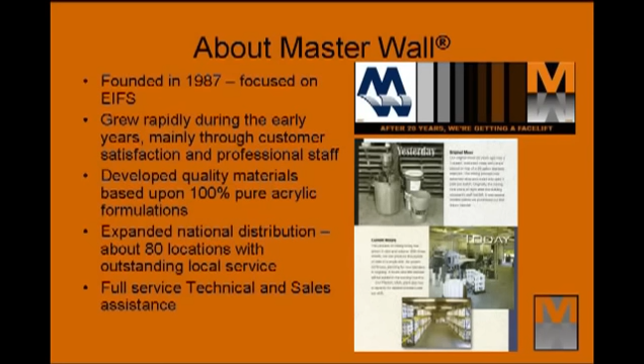Master Wall was founded in 1987 and remains one of the last American-owned and privately held companies in our business. We've grown from a small regional company to one that sells internationally. We have 80 distribution points across the United States.

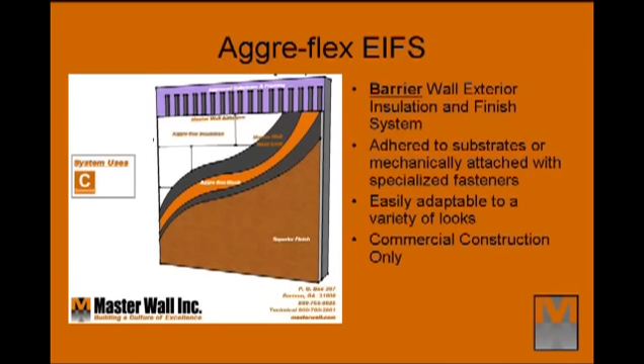Master Wall's first system was our Aggre-flex exterior insulation and finish system. It's a barrier wall system that is adhered to approved substrates or mechanically attached with approved fasteners. It adapts to a variety of construction types and a variety of looks, but is limited to commercial construction only.

Rollershield drainage EIFS is our most popular exterior insulation and finish system. It's a drainage type wall system over our Rollershield liquid applied air and water barrier. The system is adhered to the Rollershield with vertical drainage channels, and like Aggre-flex, it is easily adaptable to a variety of looks, but also provides drainage.

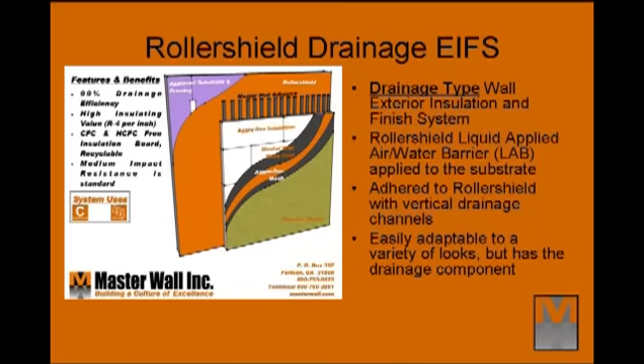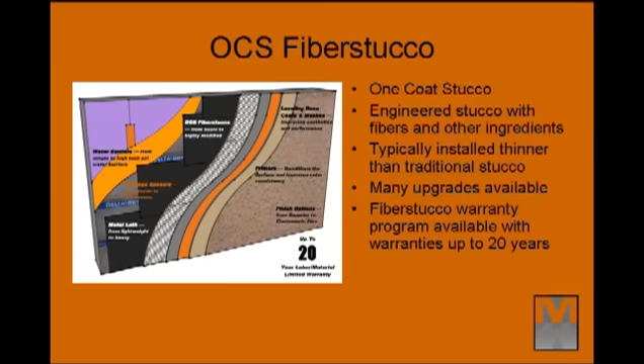OCS fiber stucco is our engineered one-coat stucco. It's typically installed thinner than traditional stucco, but has fibers for better durability. Master Wall has many upgrades available with warranties up to 20 years.

Aggre-flex drainage EIFS is mechanically attached over a water barrier and an approved substrate. Water barriers can be as simple as 15-pound felt, or it can be a profiled type water barrier. Flat or wavy insulation board can be used, and this type of installation is common on residential and some light commercial projects.

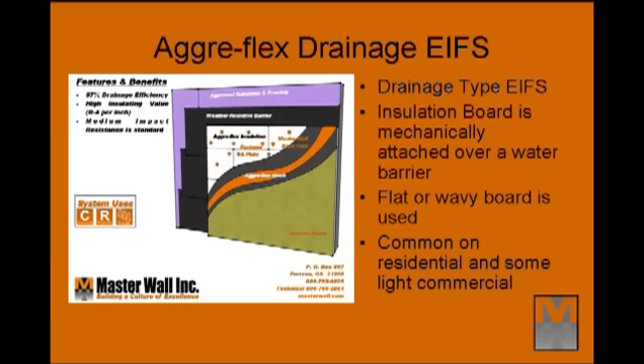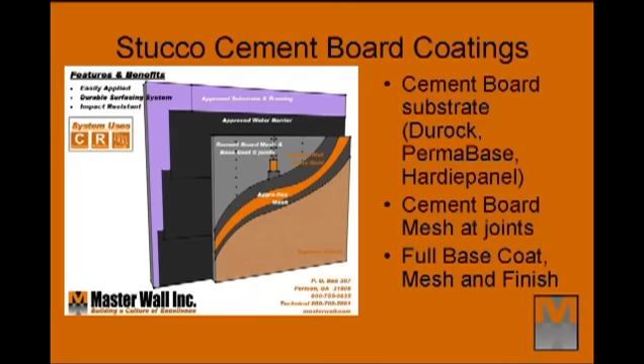Stucco cement board coatings are applied over a cement board substrate such as Durock, Permabase, or Hardiepanel. We use cement board mesh at our joints and then full base coat, mesh, and finish to complete the project.

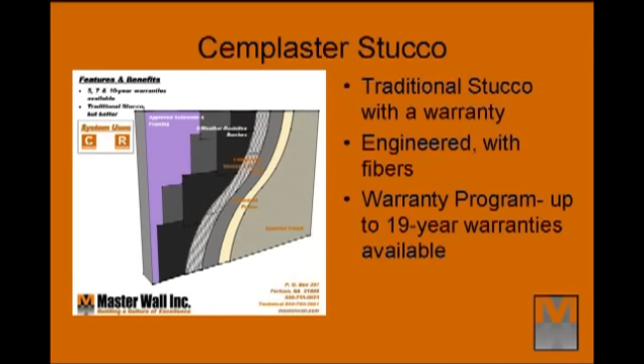Master Wall Cemplaster stucco is our traditional stucco but with a warranty. It's an engineered stucco with fibers in it for better crack resistance, and we offer it with a warranty program with warranties up to 19 years available.

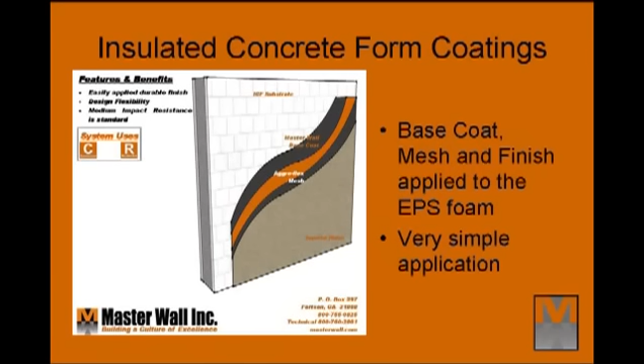Insulated concrete forms are made for Masterwall. We apply our base coat, mesh, and finish directly over the insulation board. It's a very simple application and very effective.

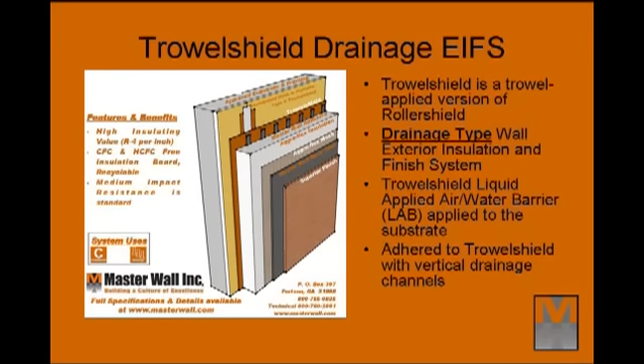Trowelshield drainage is similar to Rollershield drainage, with the exception that it uses Trowelshield, our trowel applied air and water barrier, instead of the Rollershield.

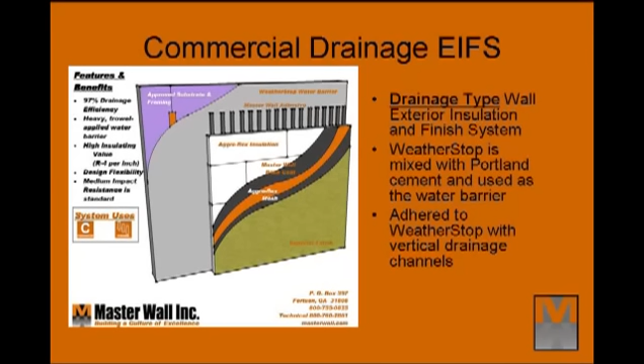Commercial drainage EIFS features a channeled adhesive design adhered to our WeatherStop, which is our Portland cement air and water barrier. We use WeatherStop flashing tapes at windows and doors to seal in the system.

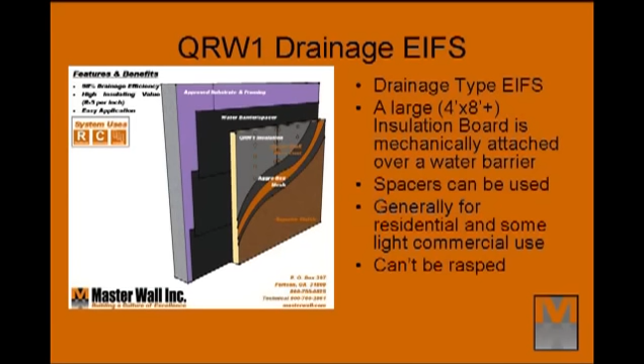QRW1 drainage EIFS uses large 4x8 sheets, sometimes larger insulation board, that are mechanically attached over a sheet type water barrier. We can use spacers with it, and it's generally used with residential and light commercial construction. One of the disadvantages of this system is that it cannot be rasped to level the surface.

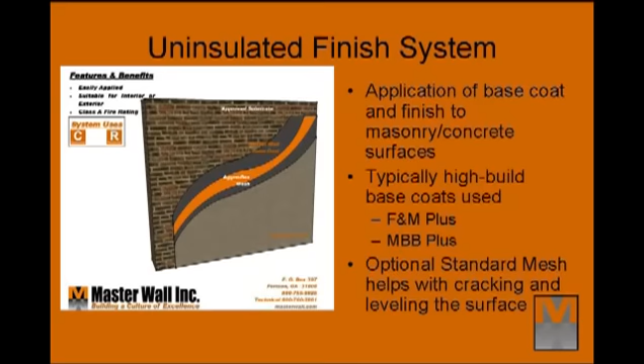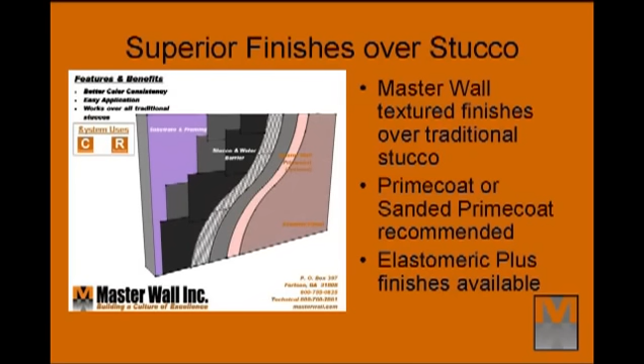We can also apply our superior finishes directly over a traditional stucco surface. We recommend prime coat or sanded prime coat for better color consistency, and elastomeric plus finishes are also available to bridge minor hairline cracks common in stucco.

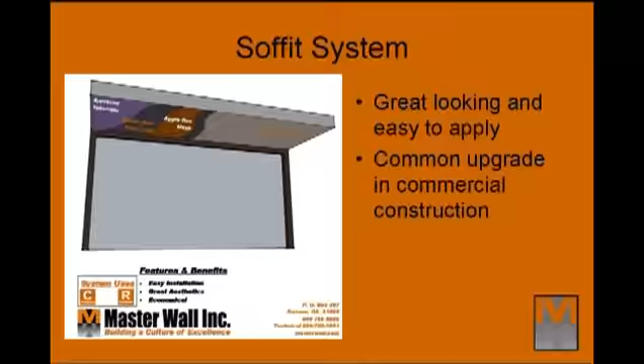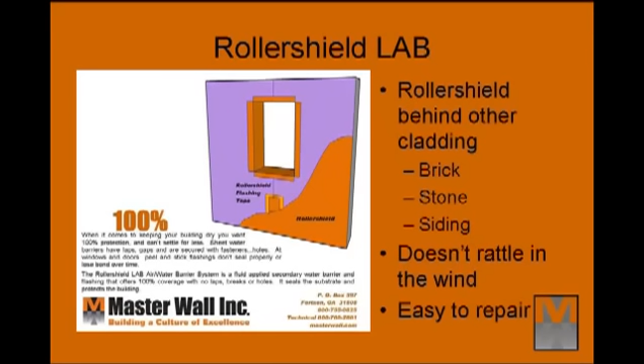Our Rollershield LAB is a liquid applied air and water barrier that's applied over approved substrates and can be used under cladding such as brick, stone, siding, and eaves. A benefit of it compared to sheet water barriers is that it doesn't rattle in the wind, it's very easy to repair, and it's very easy to tell if you've got the proper coverage.

Next, we'll take a look at some of the basic Aggre-flex installation details.

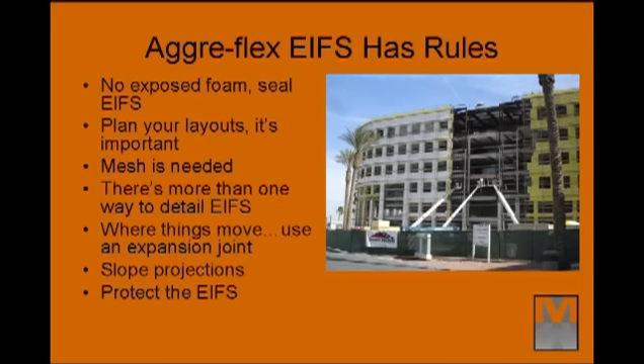Aggre-flex EIFS has basic rules. We must not have any exposed foam. We need to seal the EIFS system. Plan your layouts, it's very important to control cracking in the system. Mesh is also needed to control cracking. There's more than one way to detail an EIFS, and we're going to look at that. Where things move, we want to put an expansion joint in the system. We also want to slope any projections to shed water, and we want to protect the EIFS.

We need to seal the EIFS. The basic code requirement states that we must not have any exposed insulation board. What works best is going to depend on your preference and the design.

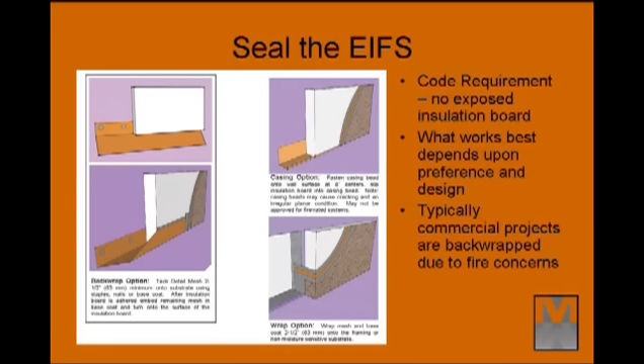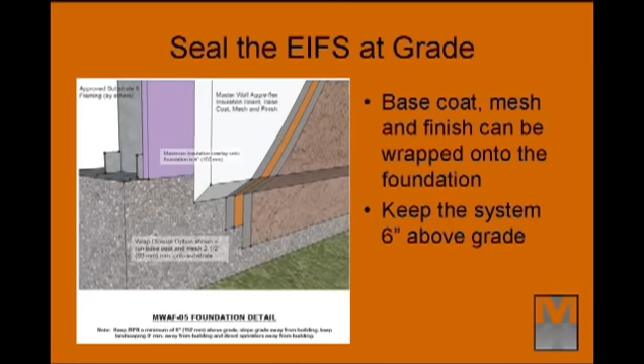Typically, commercial projects are going to be back wrapped due to fire concerns, but we do have the option of back wrapping shown at the left using a casing bead, or wrapping the system onto the foundation or into the openings. When sealing the EIFS at grade, we can run the base coat, mesh, and finish directly onto the foundation.

We want to keep the system about 6 inches above grade. We want to seal the EIFS at walkways. Any closure option is possible with this application, but we want to keep it 2 inches above the walkway to avoid any frost heave or movement problems.

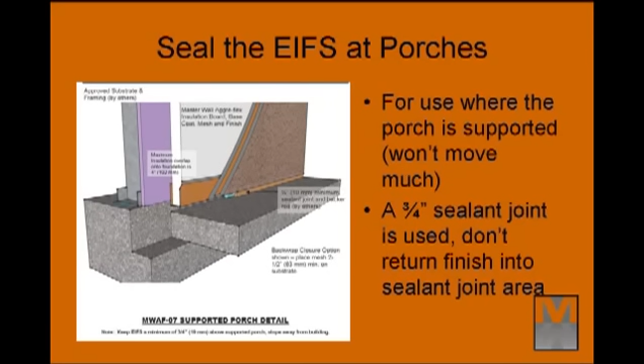We want to seal the EIFS at porches. Where the porches are supported, it means they won't move much, they won't have much frost heave, so a 3/4 inch sealant joint is typically used. It's important not to return the finish into the sealant joint area.

We want to seal the EIFS at storefront windows. In this case, wrapping the mesh onto the framing is probably the best solution. We want to make sure the window is sealed with a 1/2 inch expansion joint, and we encourage the use of interior foam sealants to help provide a good air seal. Alternate sealing methods can also be used.

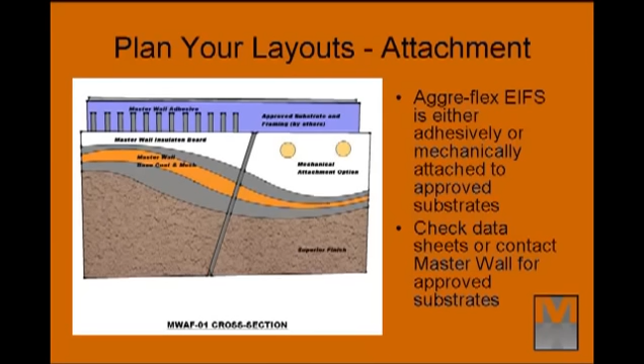Planning your layouts: with the Aggre-flex system, you need to consider your attachment method. We can use either adhesives or mechanically attach to approved substrates. Check the data sheets or contact Master Wall for the approved substrates and attachment methods.

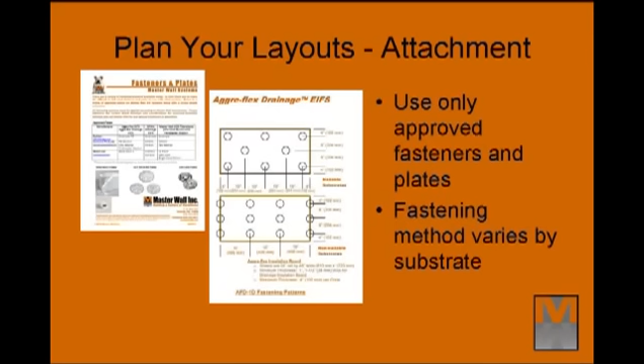When planning your attachment of the Aggre-flex system, be sure to only use approved fasteners and plates. Also, the fastening method will vary by the substrate you're attaching to.

Plan your layouts at the corners. The insulation boards are run in a running bond pattern similar to a brick. You want to interlock your inside and outside corners to reduce thermal stresses on the system. Also, the insulation board can be rasped at the corners to true up any out-of-plane conditions. Be sure to lap the meshes 12 inches either side of the corners.

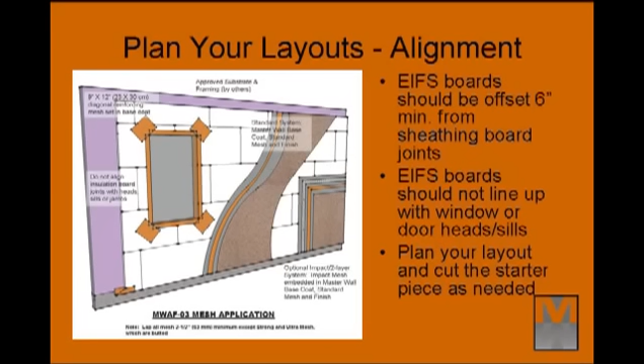Plan your insulation board alignment. The board should be offset 6 inches minimum from the sheathing board joints. Also, the board should not line up with window and door heads and sills. Also, plan your layout. You may need to cut a starter piece at the bottom so that the layout forms correctly.